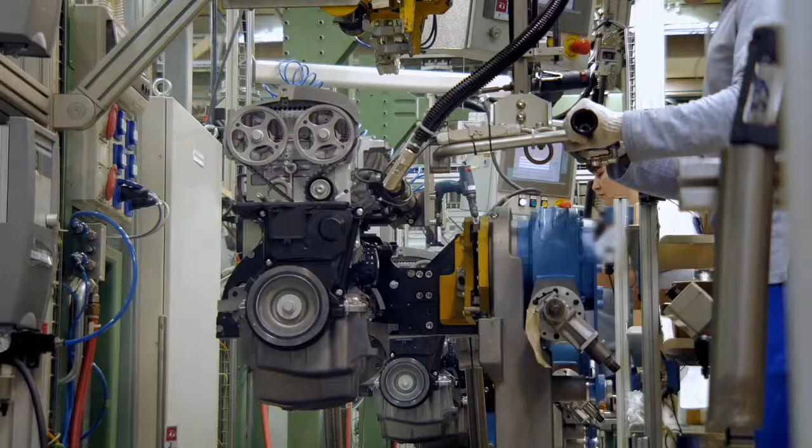If you look at the numbers, there's not a lot of competition in electric cars. There's still a bajillion gas cars being built. The electric car is like the internet, and a gas car is like a fax machine. Once you drive it, you get the difference.

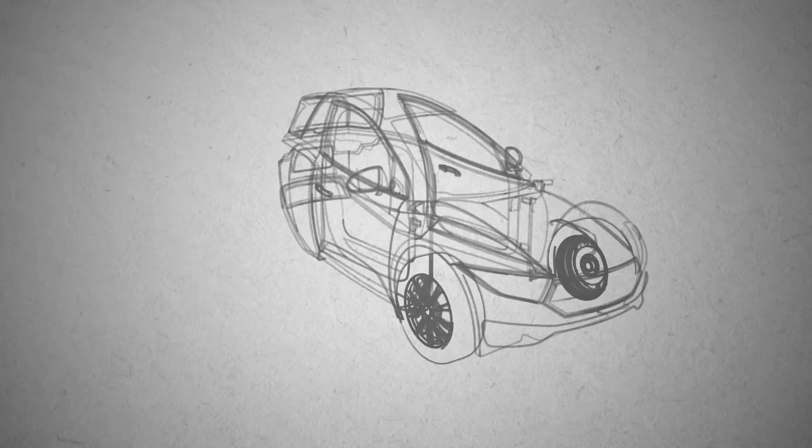We knew right away that if we were going to try to meet any kind of timeline, there was never a chance we were going to be doing this on paper. This had to go from stylus sketch into a digital design immediately. We were told that automotive firms have 200 engineers in a room and it takes them a year and a half to design a taillight. We just designed the whole car.

This car had to hit the ground and actually function. It had to perform like we expected it to - suspension had to perform, the drivetrain had to perform. Rich was brought on a little bit later in the process to do finite element analysis, chassis design and development.

What we're looking at is a totally different way of thinking with these smaller companies and how they're approaching problems. They have smaller budgets, but they have more nimble teams. And what they're looking at doing is getting tools which enable them to achieve engineering excellence on small budgets with small teams. Tools like NX, SimCenter allow them to do that.

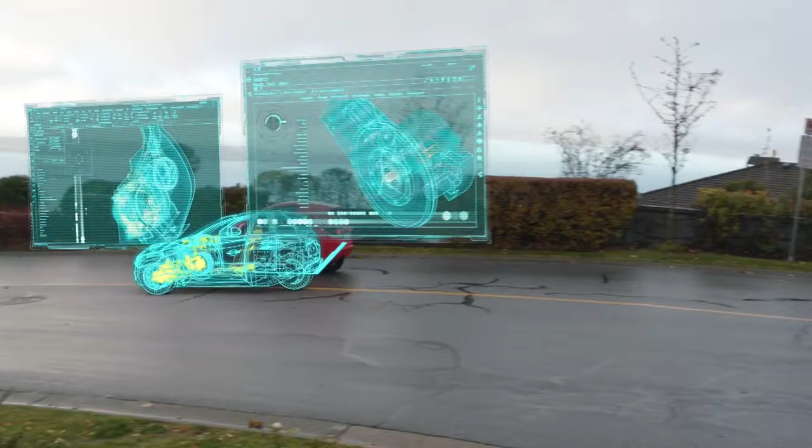So we have 75,000 of those cars coming out in the next 3 years, and more manufacturing people that we're reaching out to, top-level manufacturers. When I speak to a top-level manufacturer and tell them what software we have our car fully designed and engineered on, it makes my life and their life a lot easier to deliver those cars to consumers.

So that manufacturing provider in China, Zongshen, is also using NX as the primary tool for the design. They will take our design, evolve it slightly for high volume production, and look at all the different moldability, formability requirements that they have for their mass volume production.

We're actually able to talk to our vendors. We're able to talk to our engineer in Michigan, and he's able to talk to Tammy here in our office, and we can talk everything from mechanical bits to electrical components to wiring diagrams and everything else.

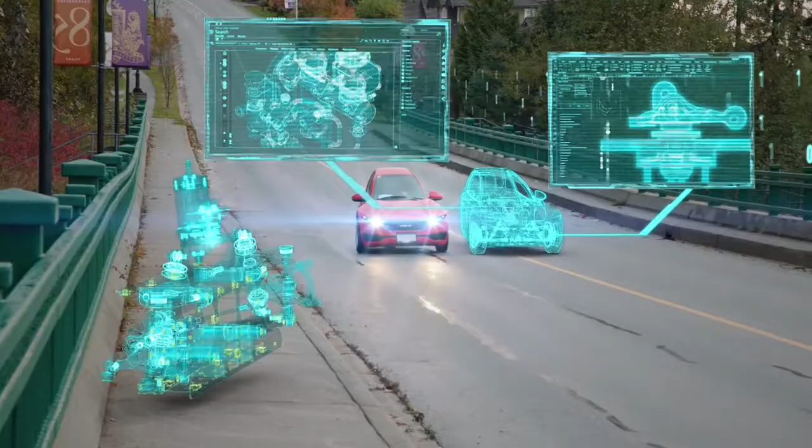With SimCenter, we have a direct parametric link back to the CAD data, all in the one GUI. That means we can analyze the design, work out - hey, can we move this? Can we reduce some mass here? Go back into the design, iterate it, 2 clicks, and we have our results updated.

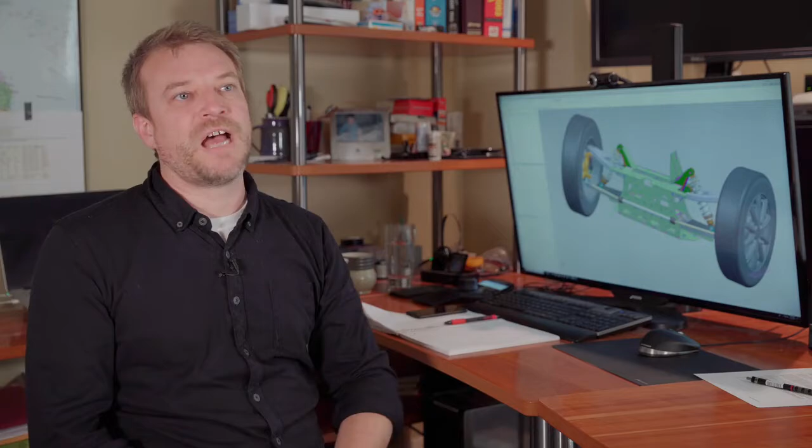These are things that were new to Intermeccanica before we started working with Maya and Siemens and pulling this in. But we brought in some fresh, scrubbed young engineers in mechatronics, mechanical engineering, electrical engineering. Tammy and the team have done a fantastic job of pulling in what they know, what Henry and I didn't know, and saying, oh, if we can get this software, this is going to be awesome.

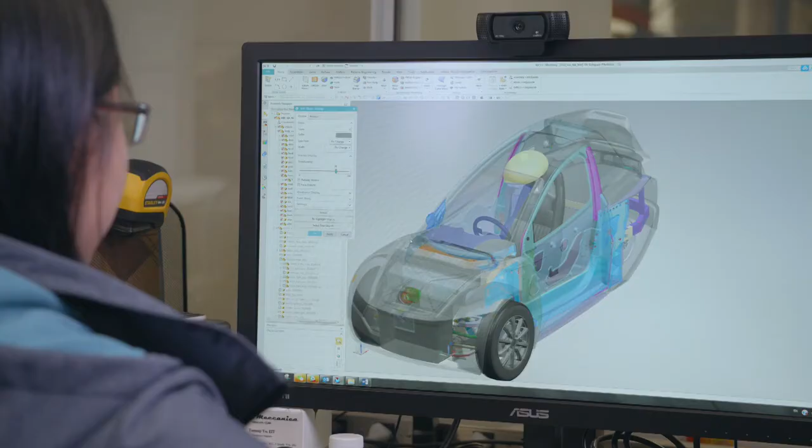Faster to market, less chance of error, better value for the end buyer of the car. Maya and Siemens can provide us the tools to make your company great. SimCenter helps a lot with certification, predicting what might go wrong, and helps us accelerate the process.

If we have all the assemblies sent out for testing and then come back with feedback that it failed, that would be about 2-3 months. If I do analysis on it, it took me about a week or two weeks of setting it up - way quicker, way faster, and saves a lot of time and money.

With Siemens and the 3D printer, we can design it and print it out right now. We can get it the next day, maybe 2 or 3 hours later, and then put it in the car to try out if it fits.

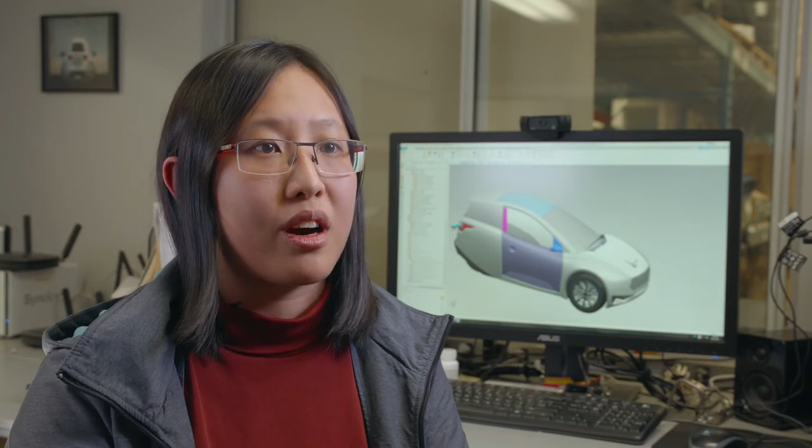So we'll generate our parametric toolpaths here, which is another benefit to keeping everything inside of the one system. Have it fully parametrically linked into our CAM software, which is inside of NX as well, and then straight to our CNC machining center. The engineers we're using at ElectraMeccanica are so inspired by this.

We can sit around, come up with an idea, or even they're coming up with an idea, or Henry's come up with an idea - boom, it's ready to go. That's awesome. You're literally unleashing the potential of the human being to not just think of a solution that will work, but create it. And there's magic in there.